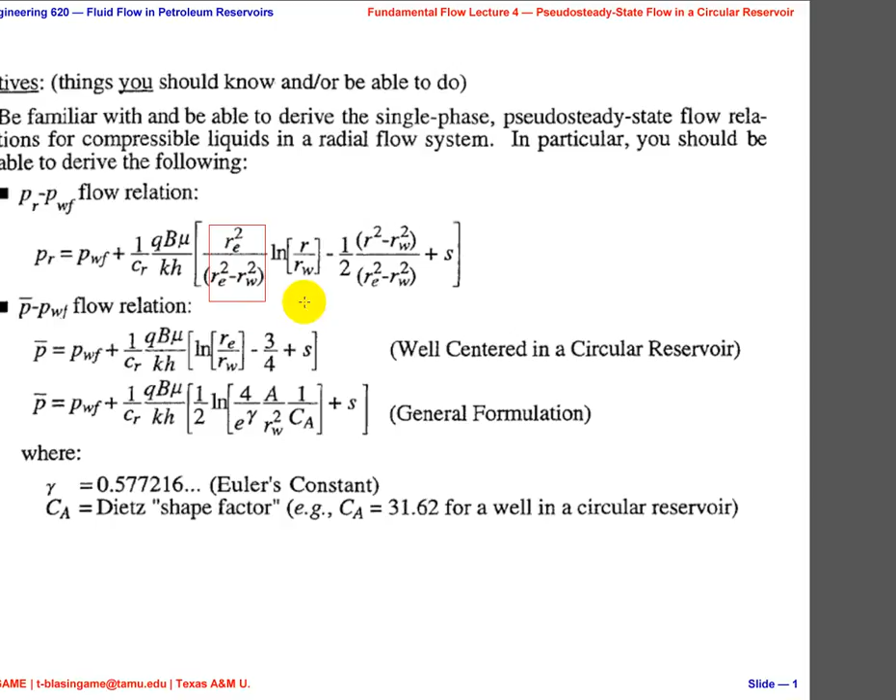And if I can metaphorically hold my thumb over this, right here, and right here, is that the same as a steady state equation if those are 1? Remember we derived the steady state equations a few nights ago? So RE squared over RE squared minus RW squared, is that approximately 1? Of course. R squared minus RW squared over RE squared minus RW squared, is that approximately equal to 1? No. So there's a little bit of a hitch, but it is still sort of familiar.

Okay, so it'd have to be that R squared over RE squared was approximately 1, but we'll come to that. So this, actually it is still right because we're scaling it, right? We're scaling the pressure in the system. We're moving across. But that first term is the one that really is tough. So we'll see. For all intents and purposes, this is the same as the steady state relationship we derived the other night, except for that funny term here. Okay, now I forgot that we have to have this as our scaling term there, but that's okay. We'll deal with that. And of course, I added the skin factor.

Why did I add the skin factor? Alex? Because anytime we're talking about wellbore pressures, we add the skin factor. Anytime we're talking about reservoir pressures, we don't have the skin factor. The skin factor only affects us where, class? At the wellbore. Okay?

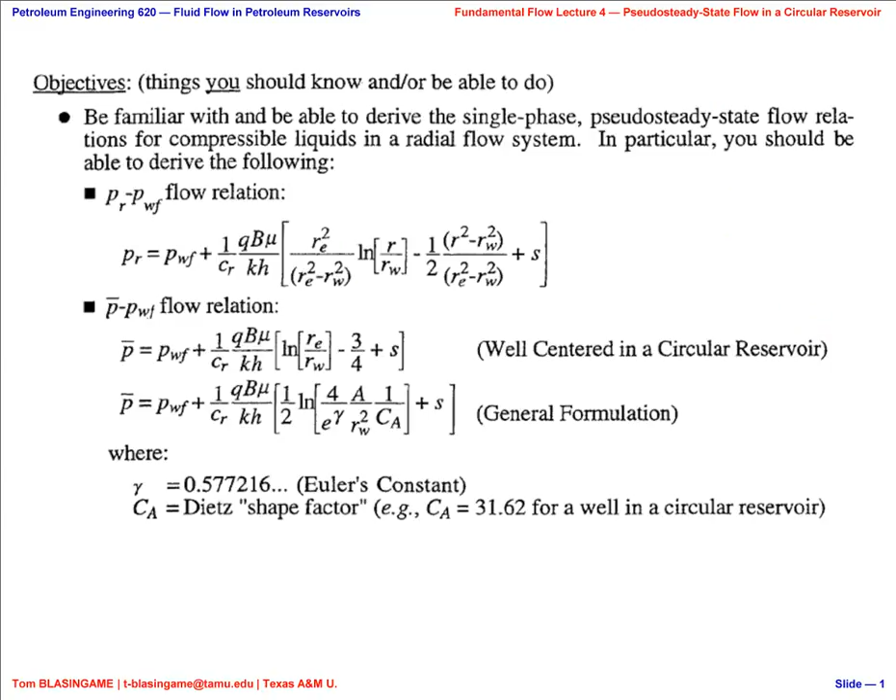And then in order to add time, how do we add time to this? This is very simple. Who wants to take a guess? Anybody? We're operating in PR or P bar, right? And we want to operate in PI. What relation do we use between PI and P bar? Material balance. So all we do is substitute in the material balance equation, and it in fact gives us that time dependency. Okay, so that's the Darcy units form, and then of course the field units form.

Now that field units form could be used to estimate what? If you had pressure and time, what could that field units form be used for, class? What are the essential variables here? I'll give you a hint. This is one of them.

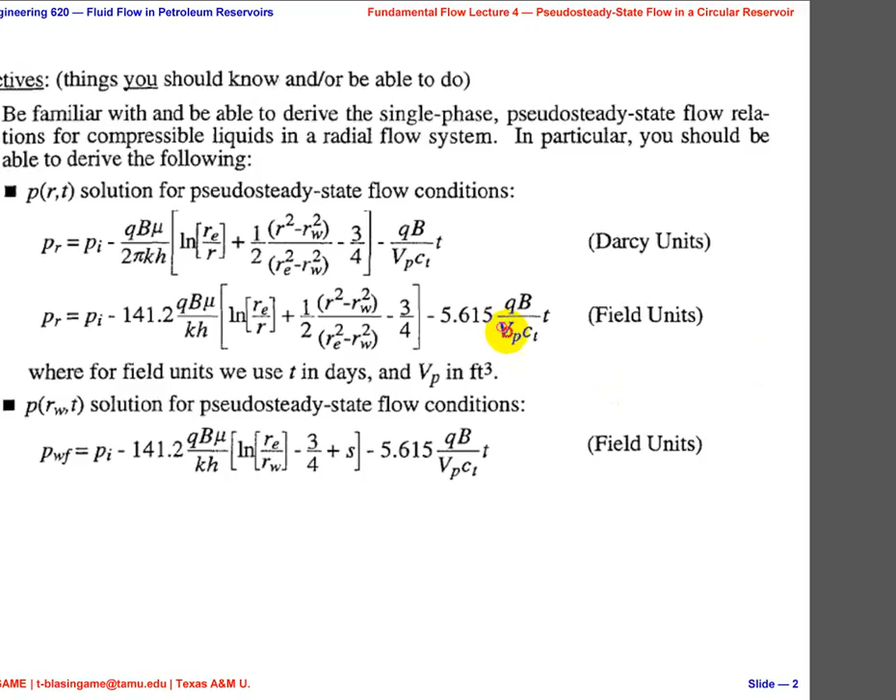Now, unfortunately, you're going to notice something. And what you're going to notice is there's permeability. Let me come down to this equation. So now we're going to have a relationship in permeability

and a relationship in skin factor and a relationship in terms of shape factor. Now I know all of you are saying, I don't care about the shape factor, Tom. I know it's a shape factor. Okay, so that whole term is lumped into one thing. It has permeability, it has skin factor, and it has shape. Okay, if it's a circle, forget it, but nothing's ever really a circle.

So there's 3 pieces of information that we want as results in one constant. That's the intercept term, right? How are we going to get it out? We're not. You can't. You cannot estimate permeability, skin factor, or the shape factor from pseudo-steady state data.

Why? Because you get a blob, a lump parameter. How do you unbuckle a lump parameter? You have to have those pieces of information from somewhere else. And the somewhere else is from transient flow, we can estimate permeability, and from transient flow, we can estimate the skin factor. So if we had both of those, then we can estimate the shape. But again, that's for a later discussion.

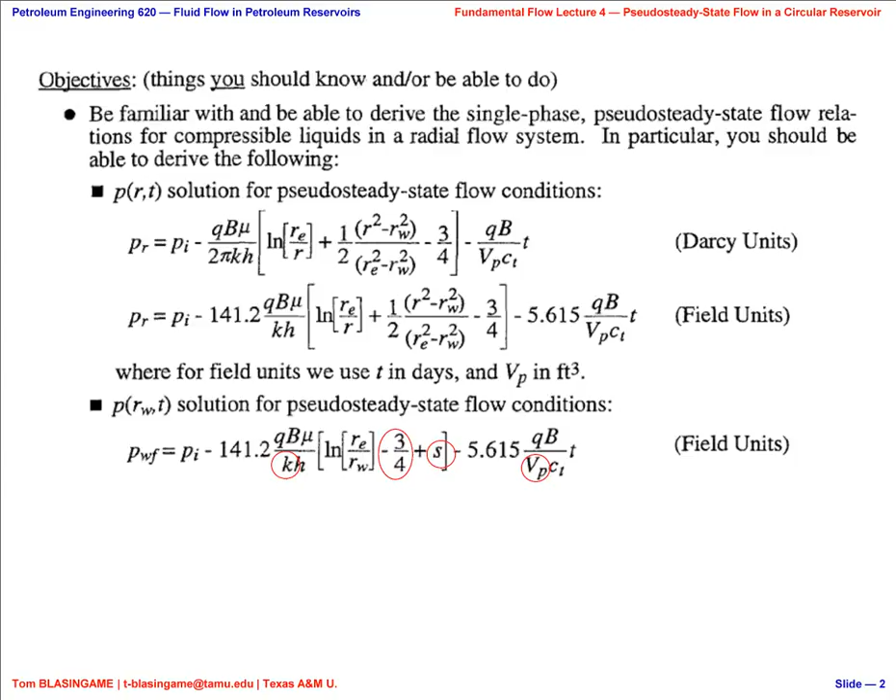All right. So to begin with, we're going to assume that the pressure at all points in the reservoir changes at the same rate. Okay? How's that going to happen, class? I'll make it real simple. Everybody stand up.

You didn't think you were going to get a gym class out of this, did you?

So when I'm at the wellbore, and you're distant from the wellbore, during transient flow, the pressure drops at the wellbore. Don't sit down. That's what happens whenever the pressure drops here - there's a corresponding continuous pressure drop across the reservoir.

At pseudo-steady state, what's going to happen? The pressure drops at the wellbore, and we all go down at the same time. I think you guys got it, except for a couple of people like Ricardo.

So, do you guys understand? The pressure at all points in the reservoir must change at the same rate. Now, this is crazy. How can the pressure at all points in the reservoir change at the same rate? Reservoirs are gigantic. How can this happen?

Well, we must have had the pressure distribution reach the outer boundary, and the entire system is now in this decaying pressure syndrome, right?

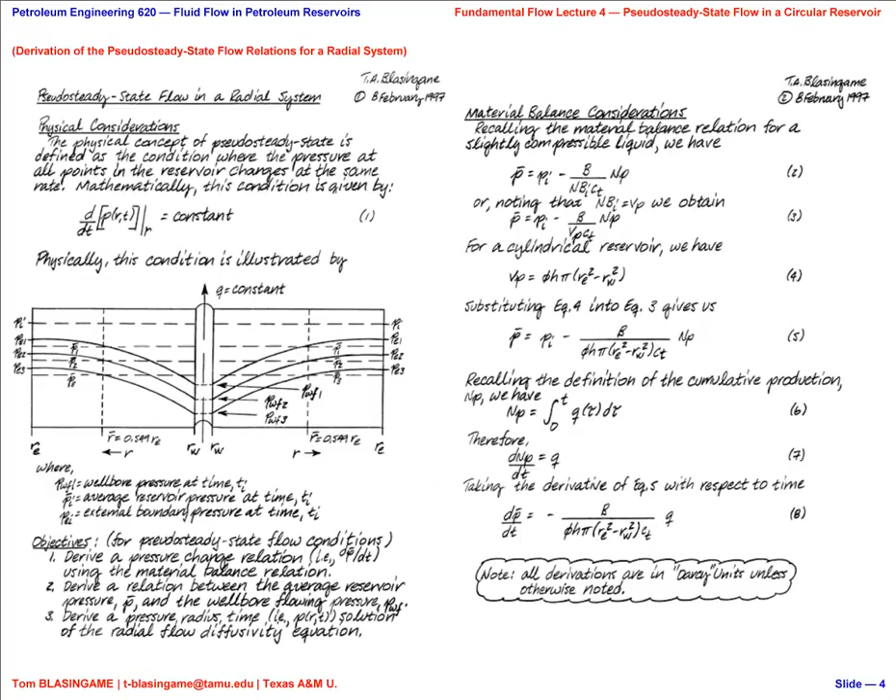The next slide tells us what?

There's a diffusivity equation. How many of you used to live in fear of the diffusivity equation? You don't admit your hatreds. You like the diffusivity equation? You didn't admit your fear. Oh, it's not fear, you just don't like it. You don't care—oh, you do care, but you don't like it. Okay, so we have an eventually honest man. Eric, you don't like it. Why?

I'll be sure and mention that at dinner next week. So I think I may have told you this, but whenever I went through the syllabus about 20 years ago, I had a geologist in the class ask me what the backward six was. And I told him the backward six was a free trip out of the class, because we were going to be talking about a lot of backward sixes in here, more towards the end.

It is a partial derivative. The assumptions of this are slightly compressible fluid, our oil above the bubble point, constant fluid viscosity, single phase flow, gravity and capillary negligible, constant permeability, and in this case we'll say horizontal radial flow, i.e. there's no vertical component, there's no tangential component. If it was, then it would be different on the left-hand side.

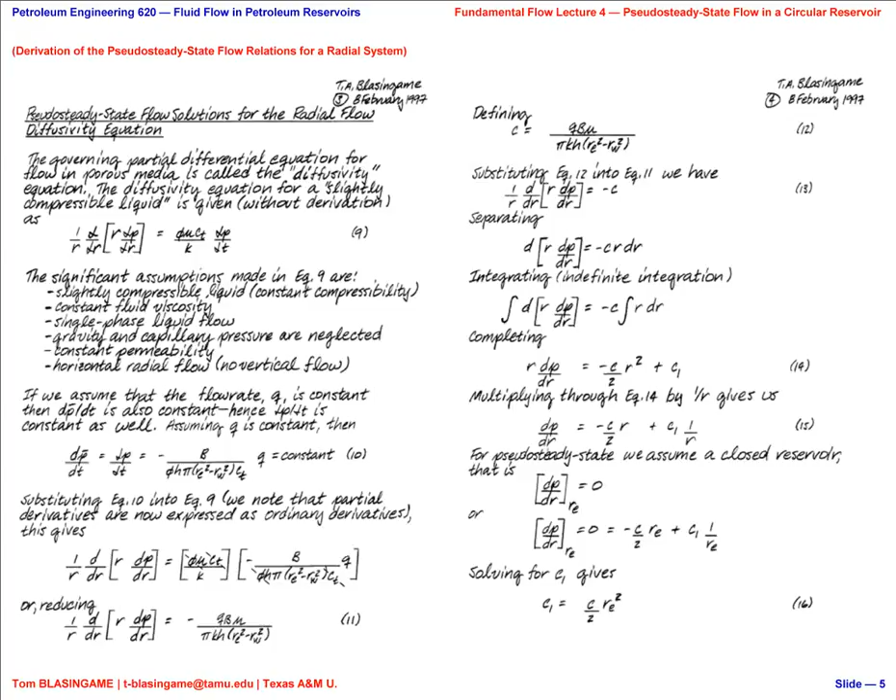But we have to make an adjustment for that. In this case, it was obvious that we had a situation where the gradient at the outer boundary was 0. So now we make that substitution. We extract the C over 2, and we now have re squared divided by r minus r.

We again have dp dr, so we separate. What's the integral of 1 over r, class? It'll be a logarithm, okay? So the first thing that happens is we integrate term by term. We again end up with r squared over 2, and now we end up with a natural log r evaluated from rw to r, and then we have the r squared over 2 evaluated from rw to r.

So equation 19 represents our expression for the pressure, which is anywhere away from the wellbore all the way up to the outer boundary, related to the wellbore pressure. So of course we substitute the value of C back into that.

We do a little bit of rearranging, and we have equation 21. 21 is exactly the same as we would obtain if we were deriving the steady state form, but in this case it's actually a pseudo steady state form, and we'll talk about that some more in a minute.

So now we have PR minus PWF is equal to some QB mu over 2 pi KH, which 2 pi again is the Darcy unit conversion. And then we have the RE squared divided by the RE squared minus RW squared. Natural log of R over RW.

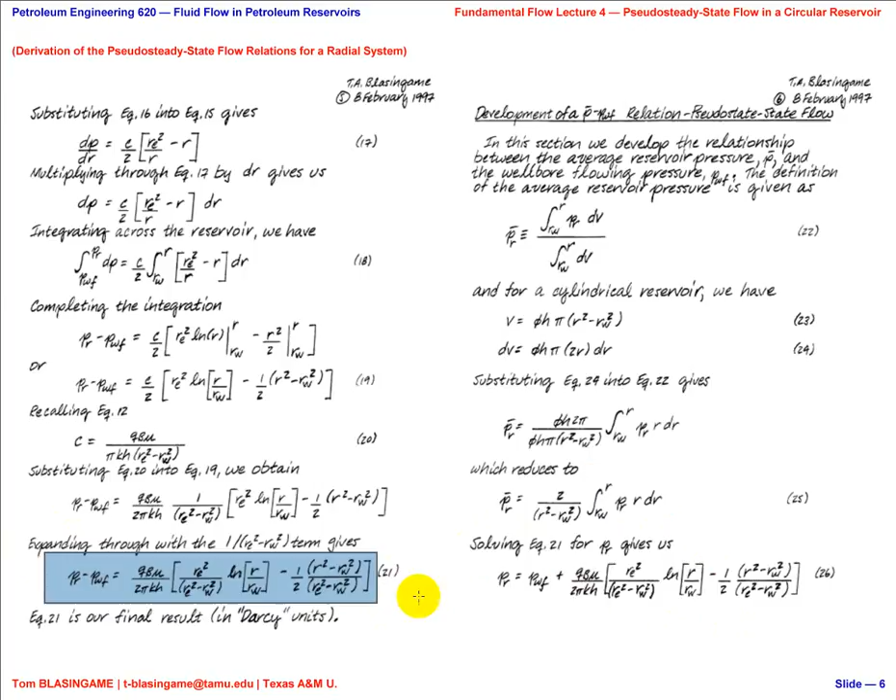And then we integrate our pressure over r, dr, pardon me. Now, we go back and we take equation 21, which is over here, and we just substitute equation 21 into this expression. I know I've repeated it here, but for the sake of argument, it's the same. And then we substitute this into here.

Now, we could go through all the algebra, and I know you're going to be really thrilled with that, but you can see that you're going to have to integrate a logarithm. And the expression for integrating a logarithm will come along in just a moment. There's also an r here, so it's actually r log r over rw. Then there's an r cubed, and then there's an r.

What's the integral of r, class? R squared over 2. What's the integral of r cubed? R to the 4th over 4, right? So what's next? What is the integral of r natural log r over rw?

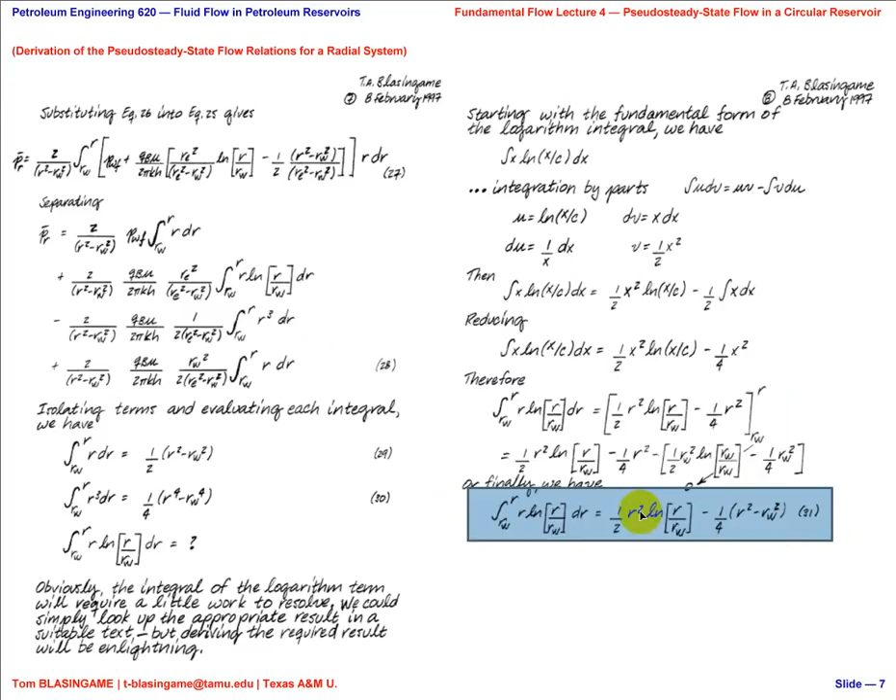Well, you could just look it up in the book, but of course we do things the hard way around here. So we'll derive it by integration by parts, and we work all that out. We have our expression given here. So our final form is equation 31. The integral of r natural log r over rw works out to be an r squared natural log r and then an r squared here.

So everything's going to work out just fine, it's a little bit ugly. So we have that term I just mentioned, we have our 1 over 4 r to the 4th term, we have our 1/2 r squared term. We start working out all the algebra, reduce, reduce, reduce, and we finally have this expression.

So before we said that this particular term, re squared over re squared minus rw squared, is approximately 1. What is r squared divided by r squared minus rw squared? Approximately, class, it's approximately what? 1. Okay, if r is large enough.

And then we have these terms over here. Now if R is equal to RE, then this is 1/4. And no matter what RW squared is, that's a very small number divided by a very big number, it's going to go away. So just as a guide, if we assume RE squared divided by RE squared minus RW squared is approximately 1, RE squared plus RW squared divided by RE squared minus RW squared is approximately 1, and RW squared divided by anything is approximately 0, that reduces this.

Now you'll notice that I stopped carrying the R because this is actually PRE. So this is evaluating this equation at the average, at the outer boundary.

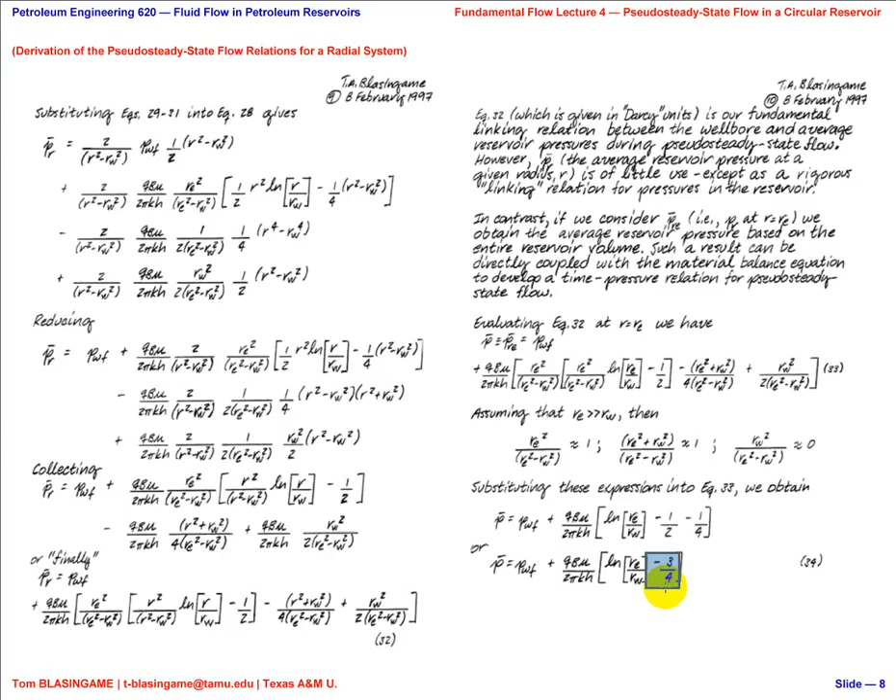So this derivation of equation number 34, pardon me, this is the building block of production engineering. You may not like it, you may think, oh this is silly, Tom, I can't believe we wasted an hour on this. But it's important that you recognize this is a building block of production engineering.

And so then we have all this summary of equations. We don't have to go over that.

Then there's a trick, and the trick is: at what location can you estimate P bar? Now this is stupid, why class? Because we don't know the pressure distribution in the reservoir anyway. But if we did, how could we estimate the average reservoir pressure? Well, we basically take one of the relationships, set it equal to 0, and it solves out. Does anybody want to guess? Is the answer a half? No, what is it?

So if we take that value of R divided by RE, it's approximately 0.55. Okay, so just, there you go.

So what? All right, now we're going to go back and use the material balance equation. We'll recast it into this form, which is the Darcy units form. We already saw this earlier. And what we're going to do is substitute this expression into equation 45, and that will give us the relationship for pressure, initial pressure, and all the other things.

So this equation, again, we just derived. This equation is a material balance equation. So we're going to take this P bar and set it into this term, and we're going to solve it, and it's going to give us equation 47.

So Cameron, are you going to behave when you go to San Antonio? Did you already sign the form? Do you know what I was going to put on it? That I will not pay bail. Do you guys understand what bail is? You just got the look of somebody that needs bail money. Don't worry, Joker, I'm sure you'll be there too. I promised my mom I won't go to jail. Really? In the USA? Have you been to jail in India? No, that's another discussion. Why don't you give me a heads up? I won't ask you for bail money. You will? No, I won't. Never, I'm not in India. That'd be the ultimate long distance call, just for me to tell you no. Okay, is this what it's supposed to look like, class? Sorry, I'm rubbing my eyeball here, that's what happens when you get old and tired. You guys didn't happen to see my daughter today, did you? She was around the office. Yesterday I bought a Monster and she drank it. It's tough having a daughter. Miss Wang, Miss Zhang, do you agree, is it better to be a girl? Probably so, right? You can get away with murder with your father. So did I draw this correctly, class?

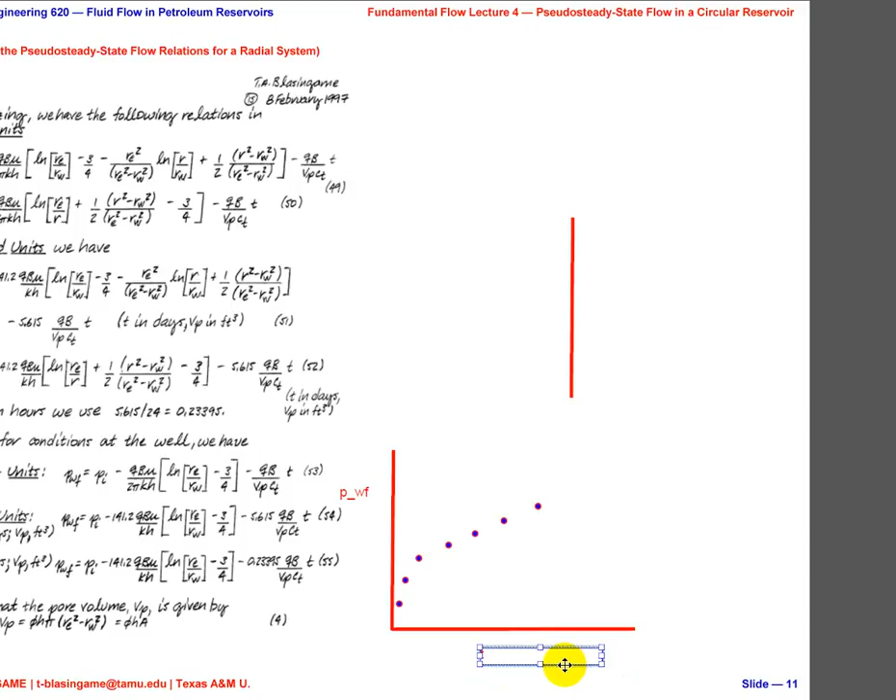Alex told me you guys were really good while I was gone, thank you for that. You like dash lines? What's your favorite color, Mr. Sarkar? I bet you're a green. No?

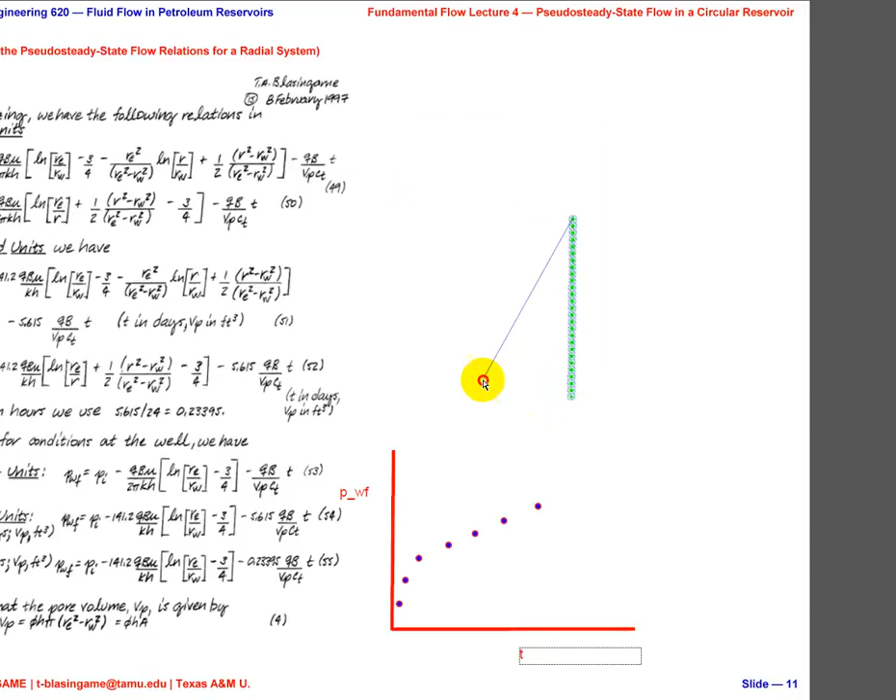You guys hate graphical analysis, don't you? I think the computer should just do it all for you, right?

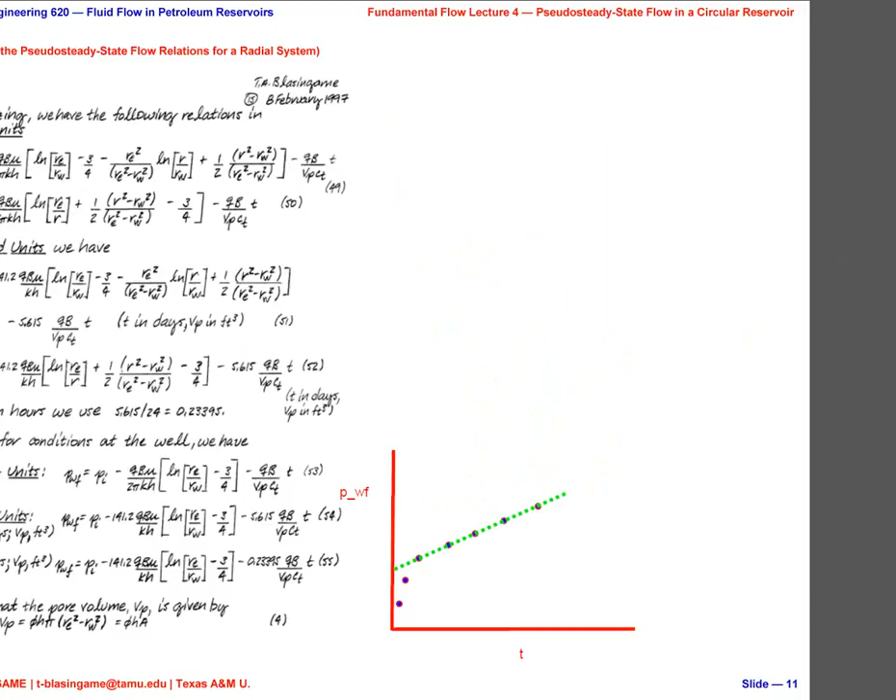Okay, so somebody tell me what I've just drawn. Did I draw this correctly? Why not? The axis is going down. You know what they say, you mess with the bull, you get the horns. How about now? Okay, yeah, okay, but that's not nice. That should be nice, I'll fix it. Mr. Liu and Joker, they got me. The old man drew it upside down. Hey man, it's hard being old. You don't believe me? Ask some other old person.

Straight lines make up the universe.

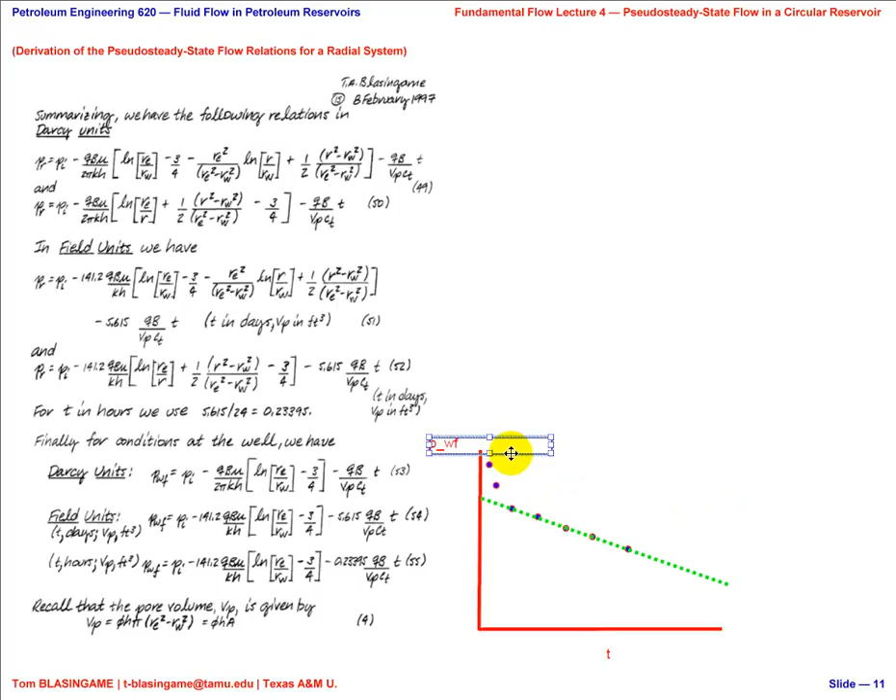Now did I understand correctly that Mr. Alex has not done special functions yet? He did Laplace transforms, right? But not special functions? Maybe I'll get them to do special functions this week. Oh, but you guys aren't leaving till Sunday, right? Yeah, because I have to be gone Friday and Saturday. Actually, I have to be gone Thursday, Friday, Saturday.

So this slope, M pseudo-steady state, is equal to what, class?

Is that right? What's the intercept? Thank you, you're very helpful.

Okay, so it's 141.2 Q B mu over K H, times the big constant.

You guys like that? When you're old, you can cheat, but not when you're young. Okay?

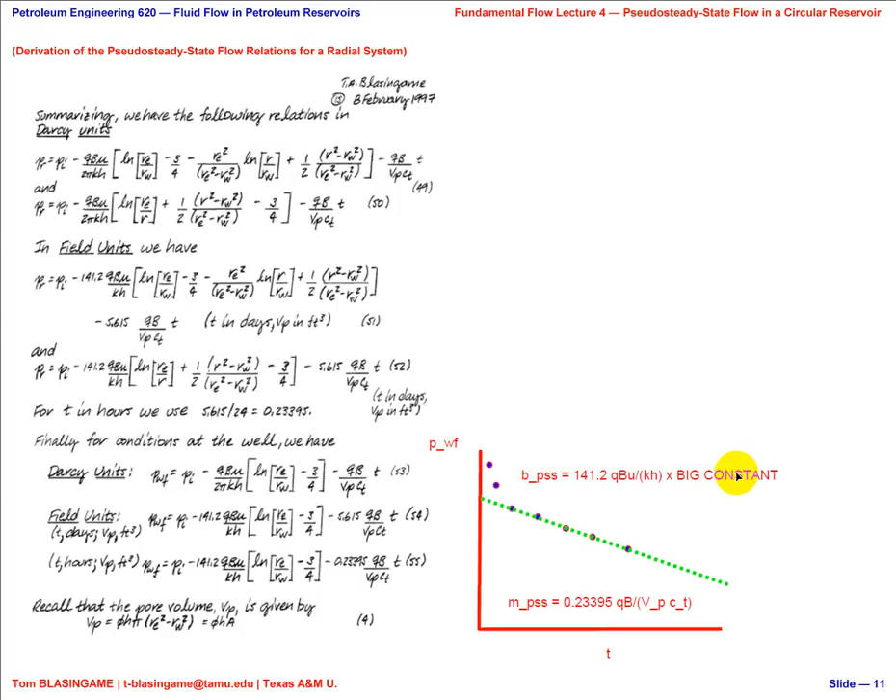Okay, well, there has to be some mystery in life, so we'll continue.

So these are some plots that I made with a simulator back when I was a lot younger. I built this simulator myself. It had about 1,000 circular cells or radial concentric cells, and what I was doing was generating constant rate profiles.

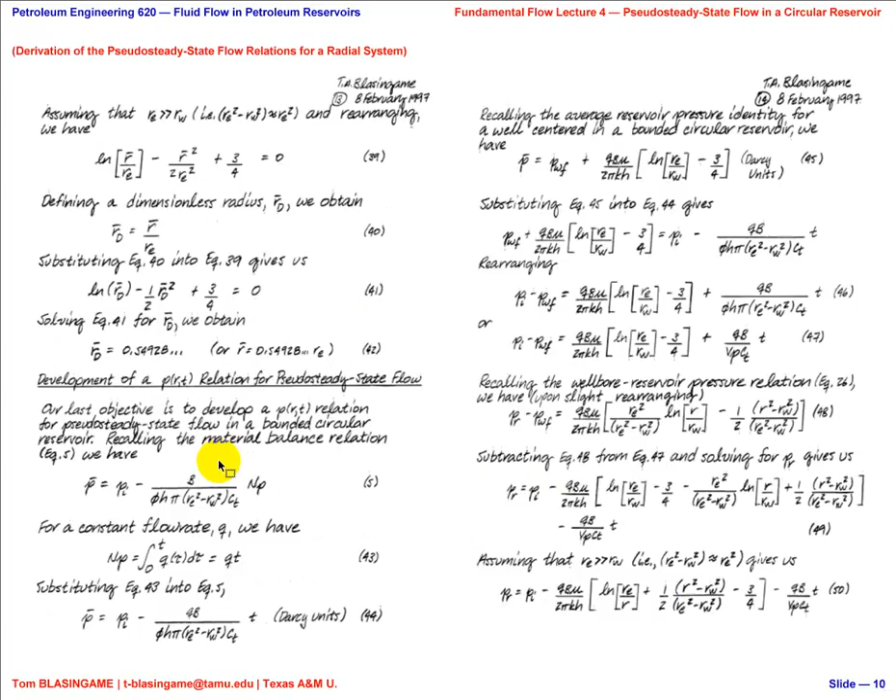This equation—what is this equation supposed to be, class? What's the equation of this line? Is it somewhere over in here? Is that the equation of that line? Yes, it is. Okay.

And then when it rolls over, it no longer matches that equation, does it? No. We need to derive this entire equation. We'll do that later, in one of the radial flow lectures. What is this 32.2 feet?

The initial pressure is 4,800 psi. What is this 3,200 feet? Or 32.2 feet? Okay, what is it though? Say it louder. Okay, but is it real? Is that why it's off a little bit?

Alex, is this a real distance? Is it real? Is there a point where the pressure goes to initial pressure? This is a fictitious point, right? Okay, you can't really solve where the pressure goes back to initial. Even if you use the full line source solution, it can't be solved.

So each one of these has its own trend. And again, these are all, as Alex called them, radii of investigation. What I've done is shown the formula. So is the formula conservative or liberal? Class? It's very conservative, because that point of intersection should be back a little ways. It's a logarithmic scale even.

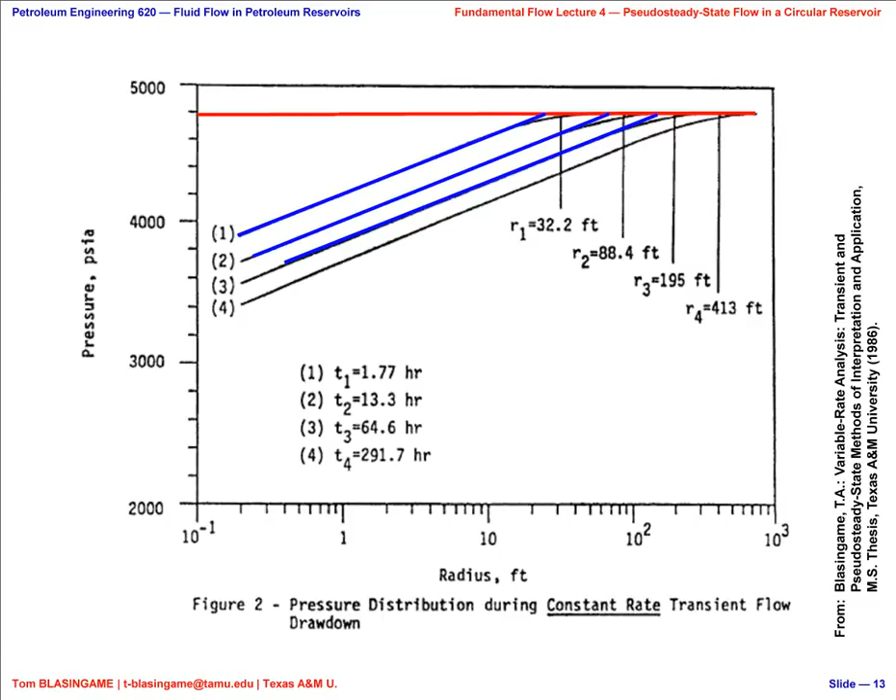Now the next plot shows the constant pressure case. Now remember, constant rate, constant pressure—now all of these lines also conform to our steady state theory. But they progress, they propagate out into the reservoir. Alex, is this concept correct for constant pressure?

Pretty much the same as we saw before, right? So approximately there, approximately there, approximately there, approximately there. So the concept of propagation, is it rate dependent or not?

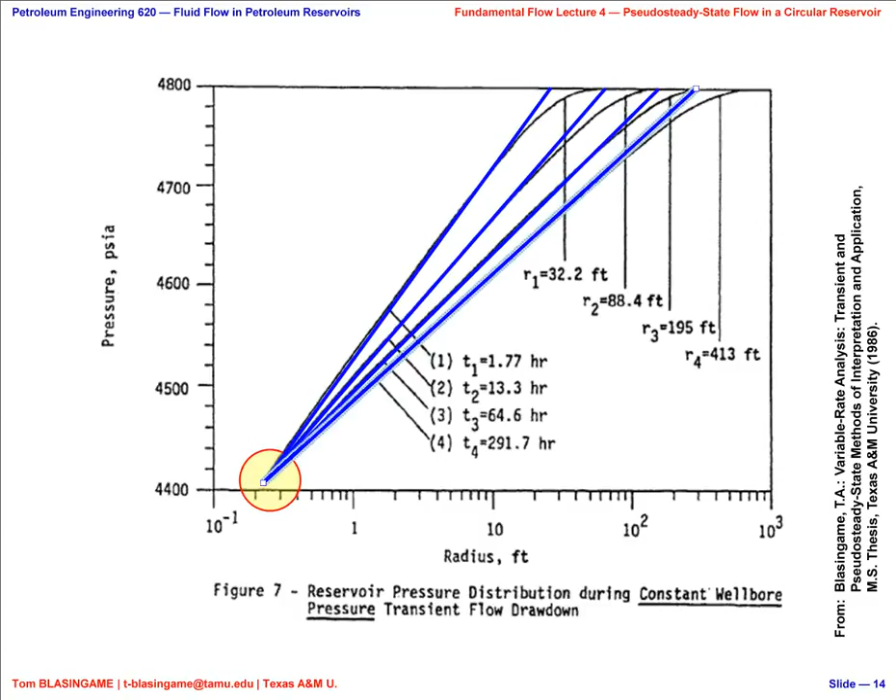No, it does not matter, and this is going to happen. Some of you are going to be on a remote location in some African country, South American country, or in the Middle East, and somebody's going to tell you that the propagation of pressure in the reservoir is a function of rate. Does this say it's a function of rate? No, this says it is not a function of rate. Now there may be certain factors which are rate dependent, like the more drawdown you create, you have a problem with gas blocking or asphaltenes or something like that, or some other element, but just raw diffusivity, no, it's not a function of rate.

Okay, now what about pseudo-steady state? Pseudo-steady state says that the pressure at all points in the reservoir must decline at the same rate. So if we take a slice of the reservoir pressure profile at different times, they should be parallel, correct? Are these parallel? Close enough, okay, close enough.

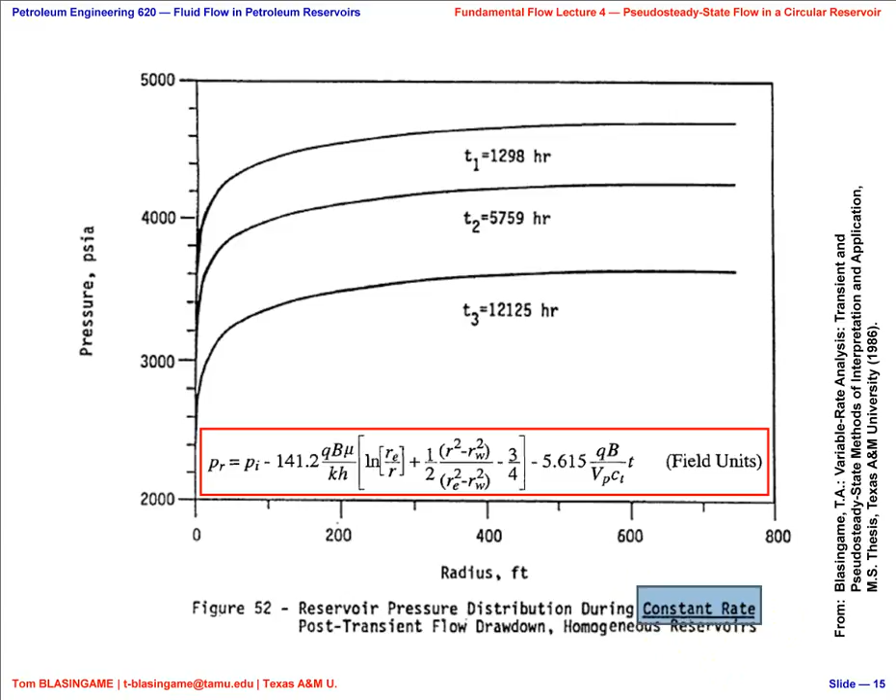Now what's the next one going to be, class? This is the constant rate case. What's the next one going to be? Constant pressure. Are these parallel? Not exactly, but they're parallel enough. So the proof is that this concept is also valid for constant pressure. I realize this is induction, this is inspection, but conceptually this concept is true for constant pressure as well.

In fact, you can derive the expression that shows that, at least for wellbore behavior, it is the same. Okay, this is a major accomplishment. Why? Because tonight we derived the equation for pressure in a bounded circular reservoir system. I know it's ideal, but we showed how it's supposed to behave.

Can it be generalized to other shapes? Of course, anything where all the boundaries are being felt is called boundary-dominated flow. If I'm the well right here, and this room, which is basically a rectangle, I start walking towards a boundary at diffusivity speed, the disturbance is going to hit here first, right? And then it's going to hit there next. And then it's going to hit there next. And a long time from now it's going to hit there. And an even longer time, it's going to hit back there, right?

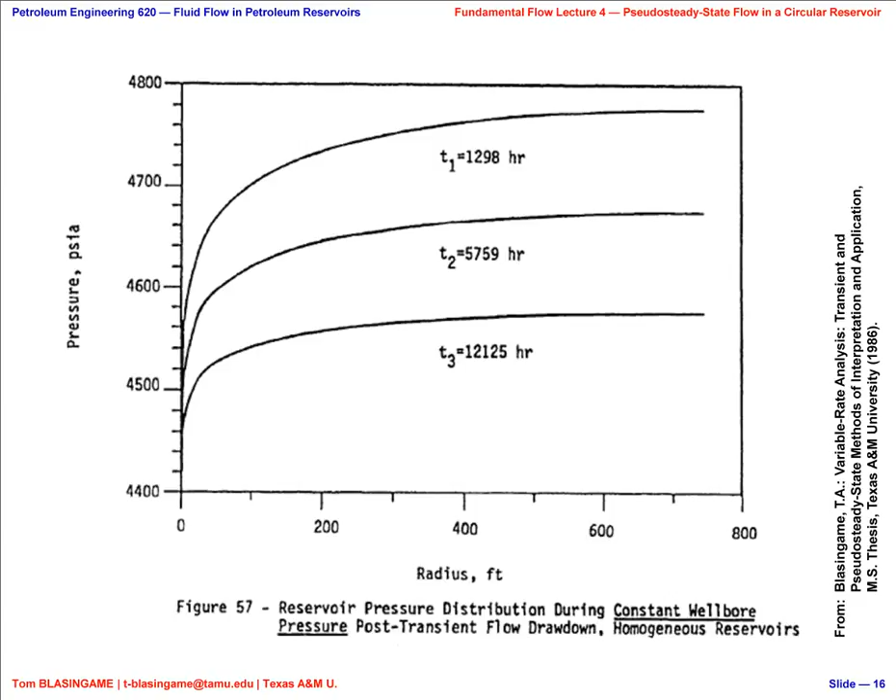You would have to take the analytical solution to this case, which includes transient, transition, and boundary dominated flow. And what would you have to do? You'd have to derive the superposition formula and then show that the terms are irrelevant. Okay, I'll send you the paper. You don't have to—I hope you don't have to write a report on it. Is it the same paper? Yes. Okay, I better stop.